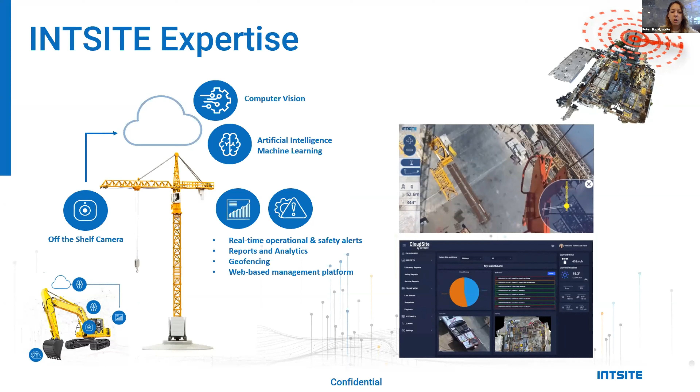So I'll talk a little bit about our solution in detail. First of all, we have our Foresight System, which is sort of like an ADAS technology for heavy machines. It gives productivity and safety solutions, and it allows for data-driven decision making. CloudSite is the output of our Foresight system, and it gives the site management teams the ability to see all of this information on a very usable web-based platform.

So as I said, the applications are vast. We can go for construction cranes, which is what we're doing here in Israel. We're also on earth moving and mining machines, which we're doing in Japan and here in Israel as well. But it can be applicable also to port cranes, buses and coaches and trucks. So we have a lot of different applications, not just on actual construction sites.

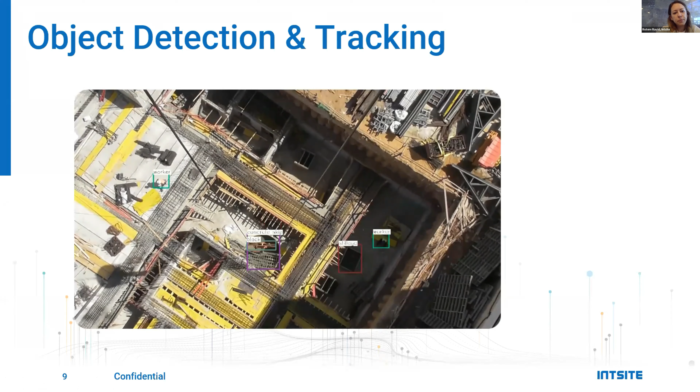So this is an example of our algorithm at work. As you can see, we can detect different objects from under the crane in real time. We can also detect workers. And I'll show you a little bit about the applications of this algorithm and what we use it for. But this gives you a general idea.

Another thing we know to do is guidance and trajectory. So we know where the crane is and where it needs to go, and we're able to provide the crane operator with a screen that looks like this. He has full HD capacities. He can zoom in and zoom out, and he has all kinds of features which he can use in order to create a more efficient and safer workspace.

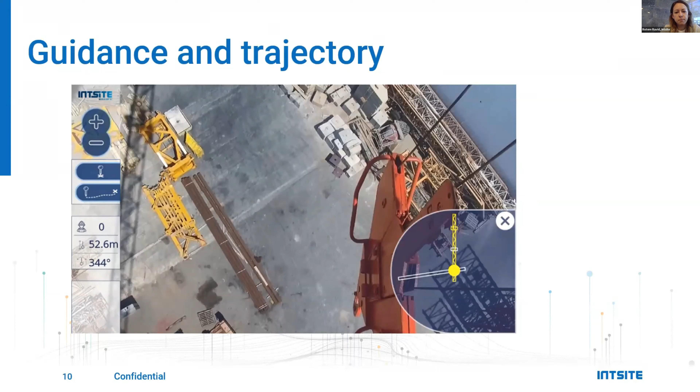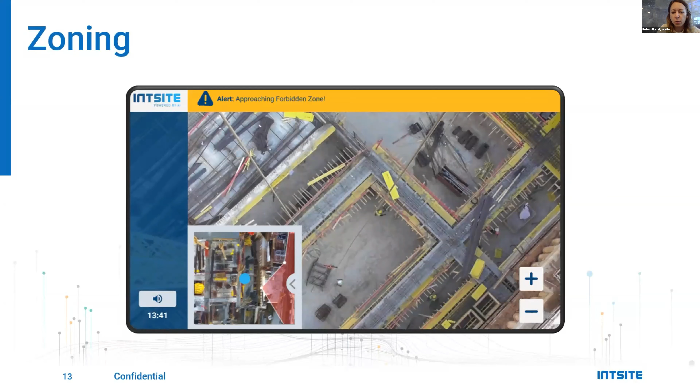Zoning, geofencing is another thing we do. I'll talk about it a little bit later, but I just want you to see the way that it appears on the operator screen. So each time that the staff on the ground has a change in terms of zoning, or there's somewhere that they don't want the crane to go, they're able to update it, and the crane operator receives an update on his screen in the form of a map, and he is updated to where he should not be going. This increases both efficiency and safety.

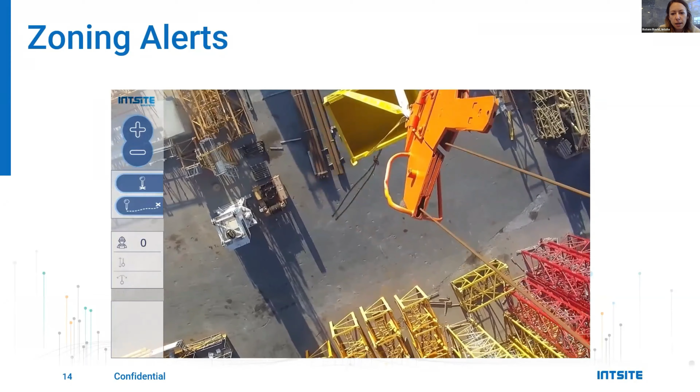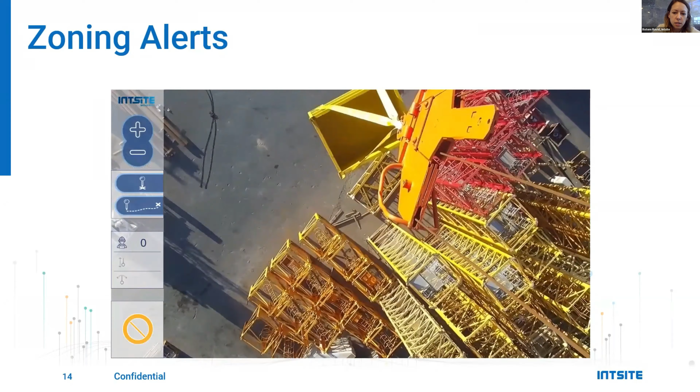Actually, what happens when there is a forbidden zone is that the crane operator receives an alert. As you can hear, the alert is when he's approaching, and then once he's in the forbidden zone, he hears the alert at a faster speed.

Okay, so the next thing that we do is CloudSite, as I said. So this is the web-based platform. You can log in through cloudsite.ai. It's all obviously by authorization only. So every user receives a username and password, and the company for which they work allots them the features and the data that they are able to see. We are GDPR compliant, and we give livestream, real-time notifications, usage reports, analytics. I'll show you a little bit about that now.

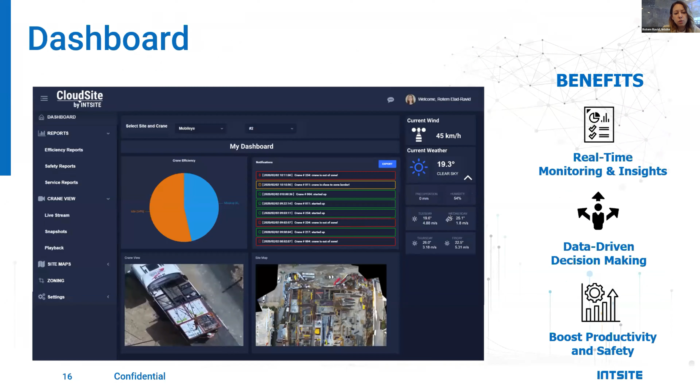This is our dashboard. You're able to see notifications, livestream. The notifications that you see can be custom made to what the customer wants and needs. Some examples of notifications are if the crane is out of zone, if it just started, if there is someone under the crane not wearing a helmet. And all of these notifications are available both on the web-based platform, but also sent to WhatsApp or SMS or WeChat at the customer's discretion. And they are able to receive only the notifications that they want in real time. So it's really sort of an assistant on site.

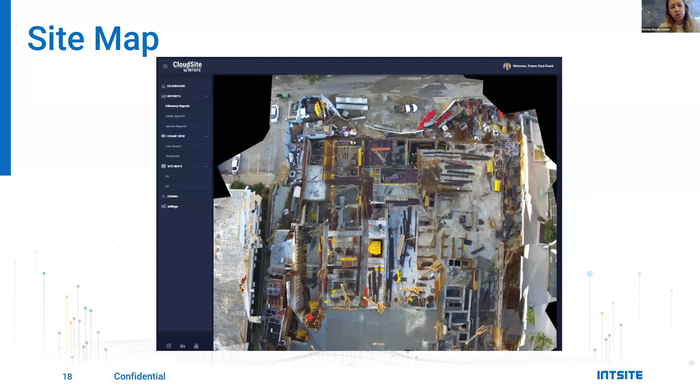Another thing we do is site maps. So we show the progress of the site over time, and we're able to show how the site has changed and evolved. This is the zoning feature on the side of the ground staff, and they're able to come into this web-based platform and choose the polygons for which they want to create a forbidden zone, and then the crane operator receives a notification that he's not allowed to go into these zones. If he does enter the zone or if he approaches it, the ground staff can choose to receive a notification saying that this occurred, so that they can really track and trace the things that are happening on site, and they can really be more hands-on without having to be actually on site.

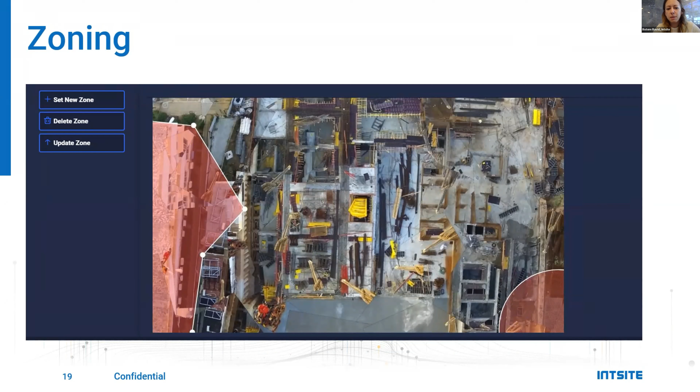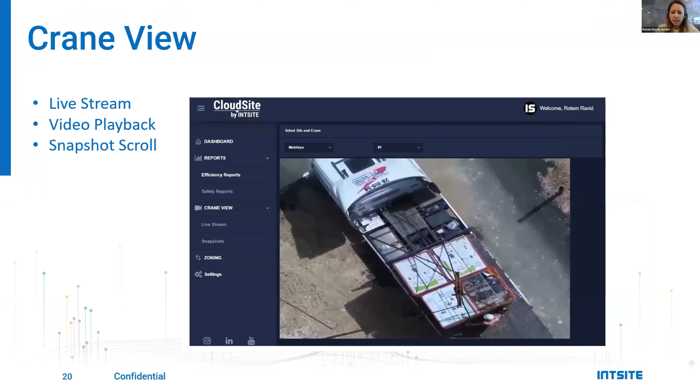Another thing we do is live stream. So we allow the users to look at what's happening under the crane in real time, and video playback, because they could play back to a certain time and date and see what happened at that time and date. This is an example of our reports, and I would like to go into some case studies.

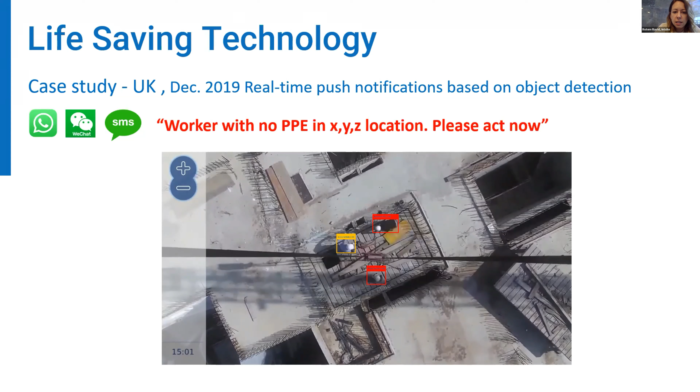So one case study that we did in the UK is, again, in the form of push notifications, is that our algorithm found, as you can see, there are 3 people here standing on these wooden beams, 2 of which are not wearing a vest, 1 of which is standing right near a shaft. So he's literally 1 step away from falling down a shaft and perhaps breaking his neck, unfortunately. So we were able to really provide the ground staff with a clear notification telling them that this was going on, and they were able to act in real time.

This is another example of our real-time notifications. This is a safety warning that involves a person in proximity to heavy machinery. So here we see that there are 2 examples of people near the heavy machinery that our cameras detected, and we were able to inform, this time in Israel in April, the ground staff that this was occurring so that they could take a look and make sure that everything was okay.

And actually in this case study, what they did is they went into the live stream and they were looking at it. They were actually not on site at the time, and they went into the live stream and they looked at the video.

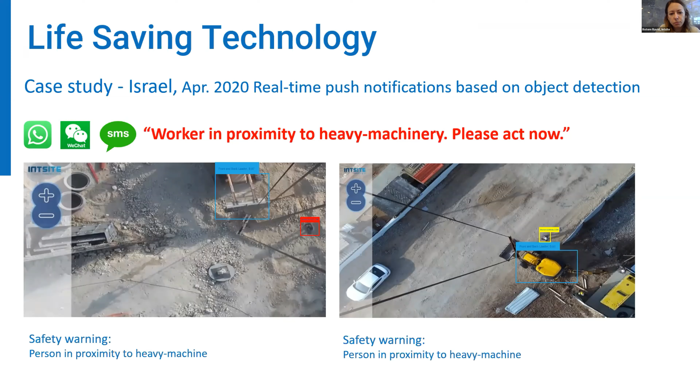So the cost of inefficiency is very high, as we said. This is an example of one of the graphs that we offer on our platform. And in our site for Mobileye, that's an Intel company in Israel, July and August, on the left side of the screen, you can see a graph that shows the hours for which the crane worked. The hours you can see on the bottom, and on the left, you see the minutes.

So every line here is if the crane was idle or if it was moving. And you could see here on the left side of the screen, there weren't very many times where the crane was moving very much. And this happened a few weeks in a row. The ground staff took charge and they hired a new foreman. And what happened afterwards was amazing because they were able to really increase the throughput of the machine. So not only did they optimize the workflow, but the real-time actionable notifications gave them the ability to increase the efficiency of the crane, this time by 19%.

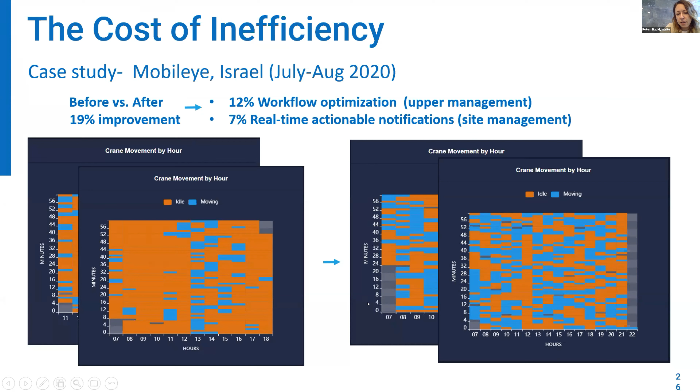This is another example of something that we did in Komatsu in the test site in Osaka in July. And here we showed through our snapshots that our excavator was actually waiting, bucket loaded, for the truck to come. This happened a few times, and this was really pushing back the timelines. So we were able to give the ground staff again here a notification that the dump truck is causing delays and it needs to speed up. So either they have to bring another dump truck or they have to awaken the driver because he's not doing his job like he should.

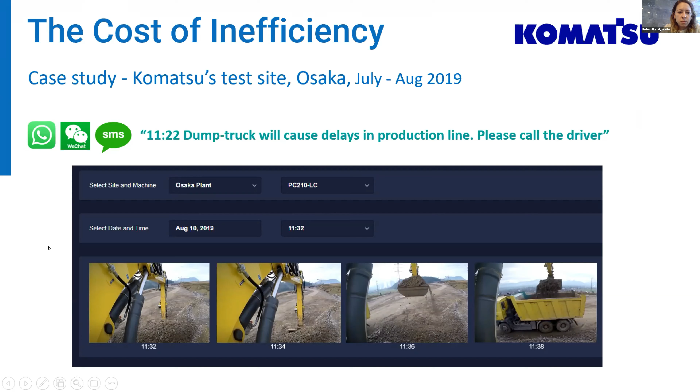One more case study that we had this time in July is that we were operating 2 tower cranes on a work site, and they wanted to take a 3rd tower crane. The daily cost in Israel is about $5,000 if we translate it to dollars. And the Foresight System allowed them to understand that the tower cranes were actually not working at full capacity. So they were working at about 78%, which means that they didn't need to take another crane. They just needed to increase the throughput of those cranes. And through our system, they were able to see where and when they could increase the throughput, and they eliminated the need of another mobile crane. So here the clear ROI is present.

Another example of something that we did in March, this is at a hospital health tower that was being built here in Haifa, is that the client was receiving daily penalties of about $10,000 because the project was being delayed, and they were having a very hard time with it. They were kind of breaking their heads as to why. And our Foresight system was installed, and we were able to show through our video playback and notifications that there was actually a neighboring crane that was causing delays because the fields in which they were working were overlapping. So the project owners were actually reimbursed, and we were able to give them an answer to this issue, and they were able to cut the penalties costs.